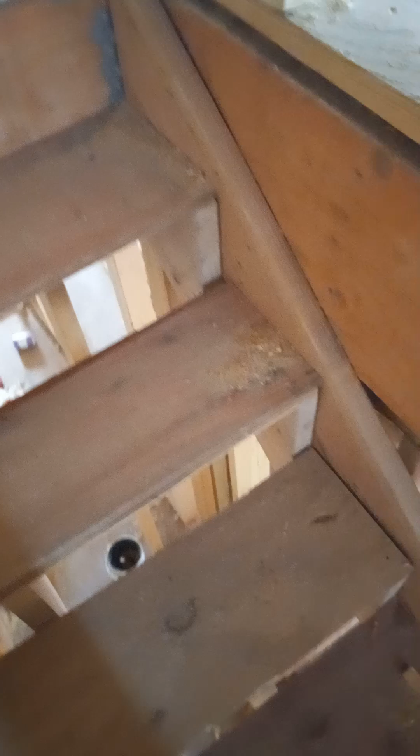Okay Eric, we're on the... hold on, get the cigar out. We're on the third floor.

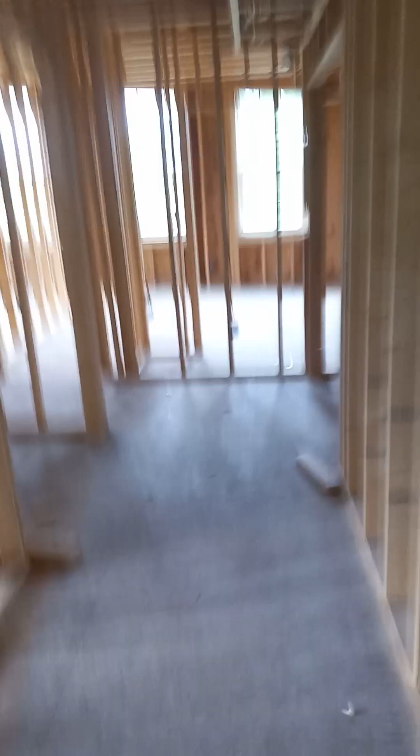Okay, let me walk in again. All right, we're on the third floor. Let me see if I can shrink this some. All right, we're on the third floor.

Okay, so here is where they have the ductwork, and here's where they have the dryer and the hot water heater. Technically, the hot water heater is supposed to be here, see the stairs there? And the washer dryer is supposed to be where they've gotten the hot water heater.

Okay, let's step into, I'm just gonna call it room one again. Okay, the closet is right. I'm gonna do it from that cavity here, is correct.

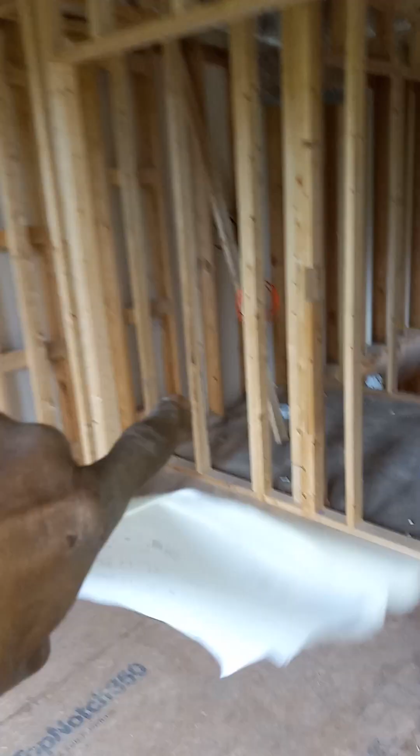Although the lights are supposed to be 4 rectangular lights going around in a square, four lights in a square, they only have 1 up here, which we can piggyback off of. All right, might have to put a junction box, but we have to piggyback off of that to make the 4 lights happen.

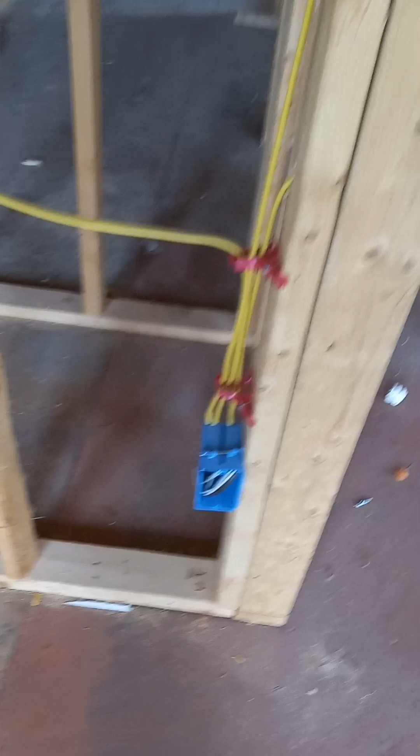There's supposed to be 1, right? Okay, I would love to take this and move it over here. So there's supposed to be 1, 2, 3, 4. Hold on one second. So I can, okay, 1, 2, 3.

I'm going to the stairway. And so, in other words, there's only supposed to be 1 outlet against this wall, but there's 2. I got to check with code and see whether an extra outlet is feasible, even though it's not on the blueprint.

No, pardon, yeah, there's supposed to be 2 here, so we might have to just put 1 centered, right, and 2 over here, and there's 2 on this wall, 1, 2. Again, it's the lighting situation in here, so we'll go to room 2.

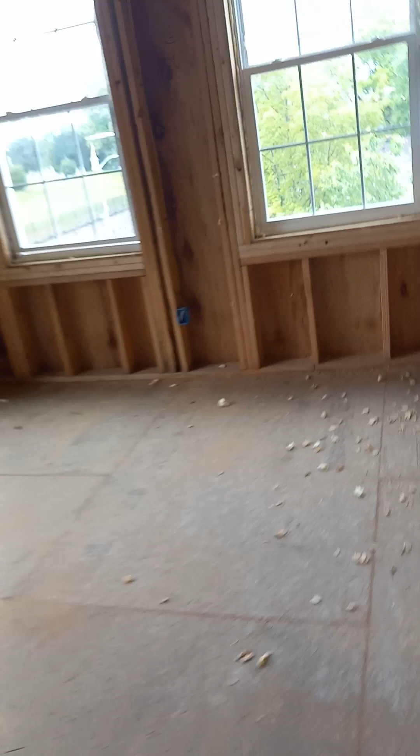All right, room 2. Again, there's only 1 light that's supposed to be 4, evenly measured and centered, you know what I'm talking about. And there's supposed to be 2, 1, 2. So it's supposed to be 2, 1, 2, 1, 1, 2. And they got a third one.

All right, so I'll have to check the code, and they got 1 here. All right, the cavity of the closet. Bear with me. The cavity of the closet is correct.

Then we get here into the bathroom, right? We're gonna have to change this lighting situation. There should be, they got the 1 light over the tub, but there should be another light somewhere along here because you got the sink, or centered, all right? We'll figure that one out.

But I don't think it definitely shouldn't be way over there, all right? Because that's the tub, and it's way over there in the corner. So that shouldn't happen. That's about maybe a foot, maybe 14 inches away from the wall, okay, and the bathroom's much bigger than that.

Everything looks to be correct here. The pipes are coming up, everything, but here they haven't installed the situation for the tub, the PVC plumbing for the tub. So that has to be done.

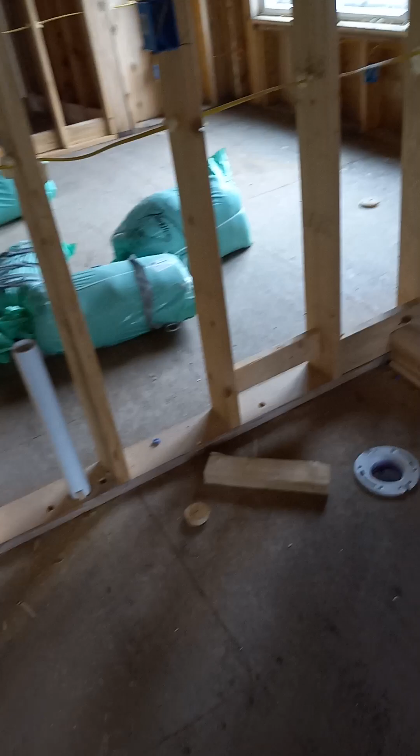Past that, it's looking like over here, 2 sinks, light. Oh, that's why they didn't do it. So we can leave that light like it is because we have 2 lights on the wall.

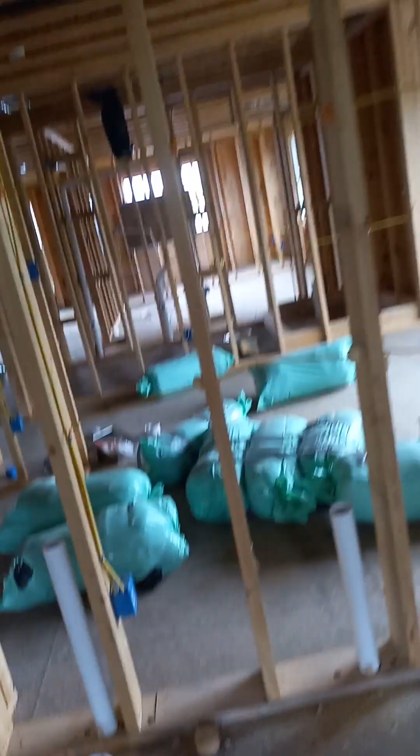I don't like these type of fixtures. I like these type of fixtures, all right, clamped on in the bathroom. These type of fixtures, those are skeletons, all right? They don't hold as well as they should. So we're looking good in the bathroom.

Now, give me a second, coming out of there. Okay, this cavity is correct.

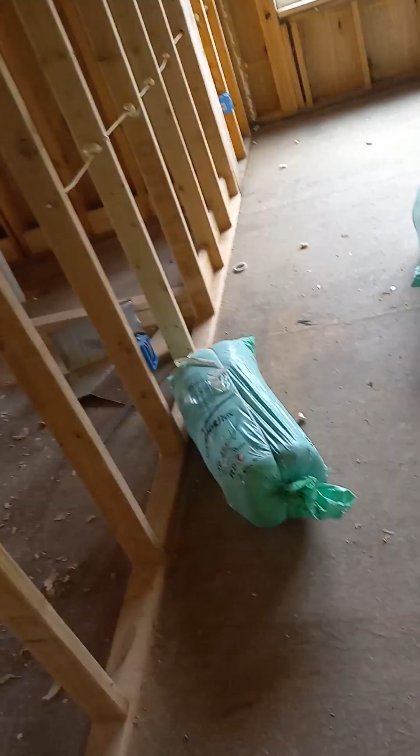Now we're going into room 3. Room 3 is the same thing, 4 lights on the ceiling, right? Measured evenly, distant evenly, and so it's all centered. All right.

Outlets are okay, 1, they got 2. There should be 1 there, there should be 1 there, there's 1 there, and there should be 2 here. So that is definitely correct. Again, it's the lighting issue.

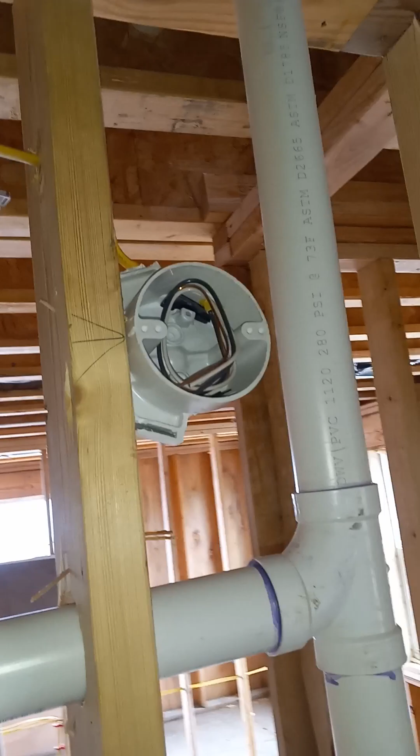Okay, so we're moving on to the next bathroom. All right, we're looking good. See over here, they put the correct boxes. All right.

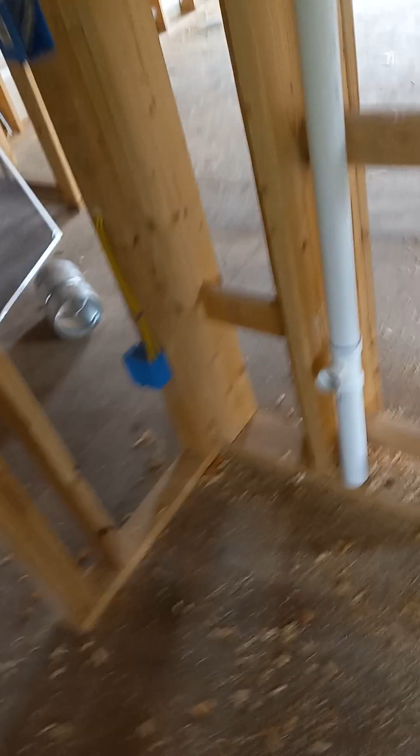I don't know why they didn't do it over there, skimming off of the money. Okay, the plumbing is looking good. GFI is looking good area, all right?

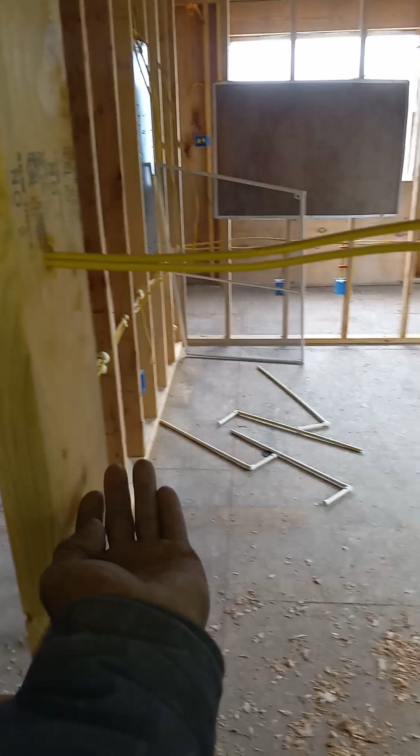Although it's a double sink, the GFI should not be over the toilet because that's the toilet and the GFI is right there in line with it. I'm trying to get back so you can see, all right? The GFI should be, let me step through this. Okay, you can see the two lights, one, two. All right, you see the plumbing, so the sink is there. GFI should be centered, even if we got to take a stud and put it across, to stud it the right way, because it's for the sink area. It shouldn't be here.

Again, this is looking good. Now, when you get here, right? This is where the kitchen is supposed to be. All right, refrigerator, stove, so forth, cabinets, so forth.

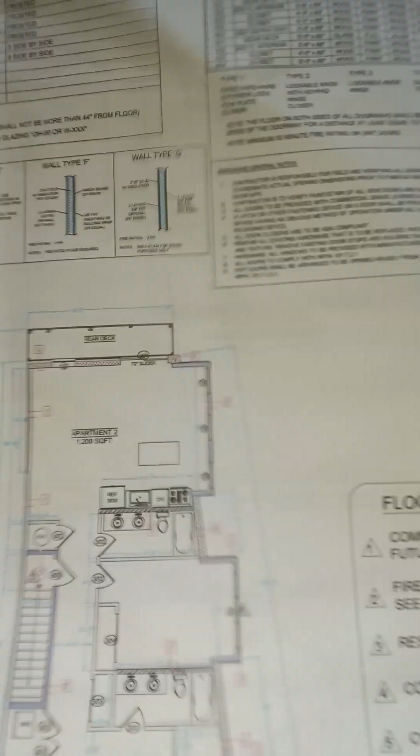This wall, and according to the blueprint, all right, let me give you what I'm talking about, right? Here's where we're at, right here. So we just left that bathroom. This is where we're at. This wall here, going all the way across, should not be there because an island is supposed to go right there as in accordance to the blueprint.

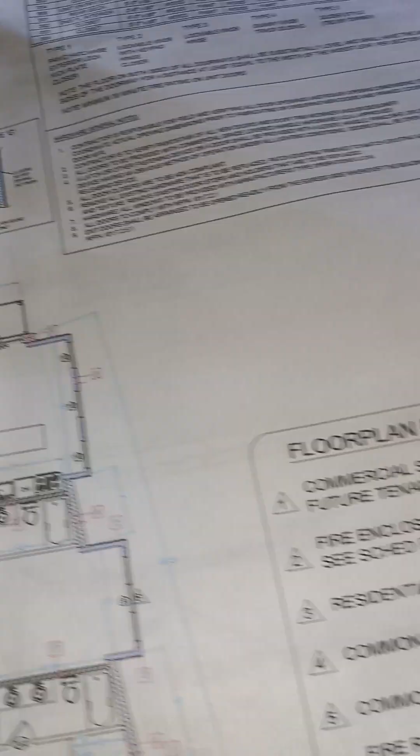And then that's what I was talking about, the rear deck. So if you're not doing the deck and they did something, maybe they changed it. But what I can't understand is why would they have an island over there with a wall around it. Okay, where the people, where's the open space for the dining room? You follow me?

So that's an issue. Okay, again, even the lights going this way, you see how they got one light, two lights, three lights, that's too many lights. They're supposed to be spaced out, and it goes on, all right? You know, you got one, two lights right together. It's not supposed to be that way, according to the blueprints.

You know about the washer dryer versus the hot water heater. So I can look at it and say, now it looks like.

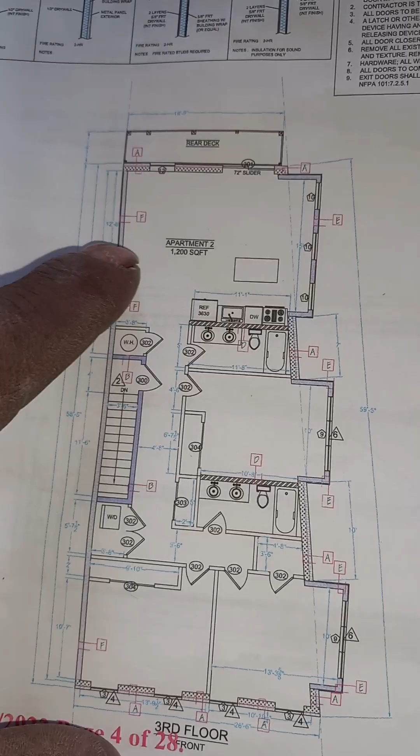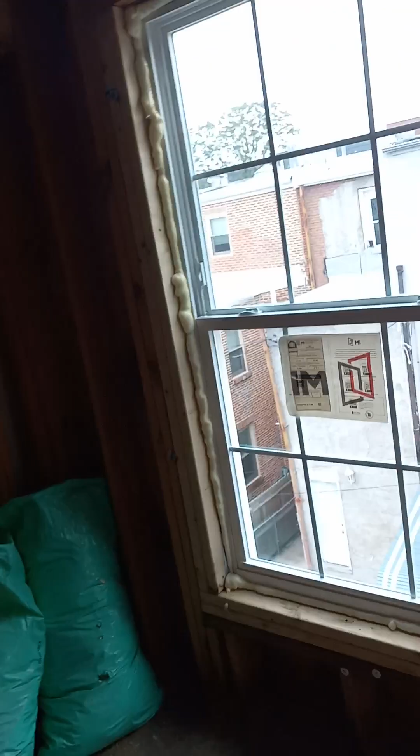So here's the blueprint, right? Now I'm going to face this wall here. That's the wall I'm going to face to right now, because this is the front. So I'm going to face this wall right here. So it seems like they put everything for the kitchen on this side of the wall, which is not supposed to be, in accordance to the blueprint. It's supposed to be over here, the kitchen. So that's what we're dealing with.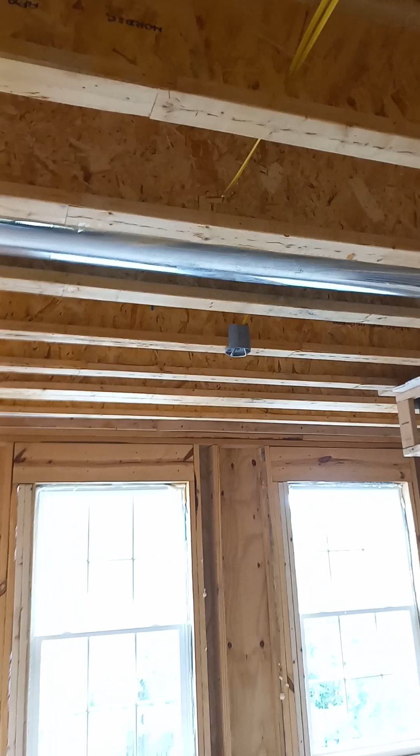They got one light there, one light there. According to the blueprint, there are to be, it's just to be, well, it is to be two lights, one light, but I think they got the symbol wrong on what this is supposed to be. But I'll have to look at the blueprints in detail to ensure that. So in this bedroom, there is one light. And there's supposed to be

One, two, three, four, five, six. So we got the closet cavity and, okay, the closet cavity. Bear with me. The closet cavity in this bedroom is correct. So we got one, two, three, four, five. All right, so what we're missing here is, bear with me.

On this wall, there should be 2 outlets on the front wall. That's what we're missing. Okay, I'm stepping into room number 2 on the second floor.

And that's looking good, the plumbing is looking good. They got the plumbing in on this one with the membrane. And we're looking good here. So that's bathroom 1. Okay, this cavity is correct on the blueprint.

Now we're going into bedroom number 3. So bedroom number 3 calls for 4 lights, which they don't have. The cavity, bear with me, I know it's pointed to the floor but I need to check the cavities. The cavity now.

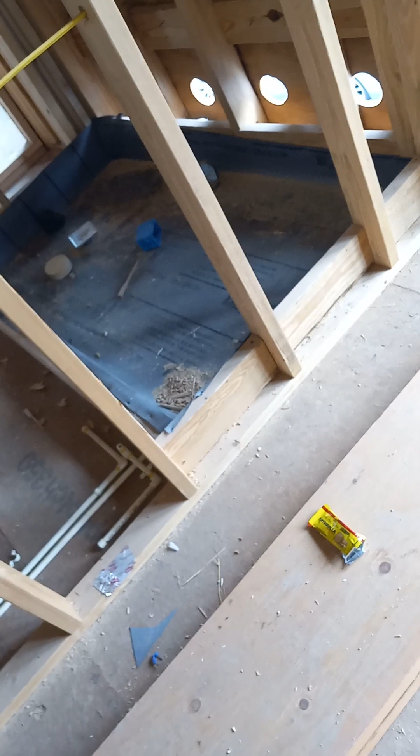Okay, the closet cavity is correct. We should have a number of 1, 2, 1, 1, 2, so we should have 3. We have 1, 2, 3, 4, 5. Okay, and if they had centered over here, but this is a rearrangement.

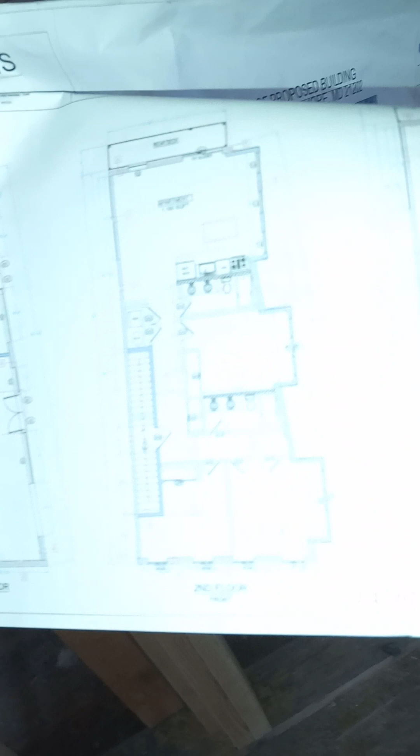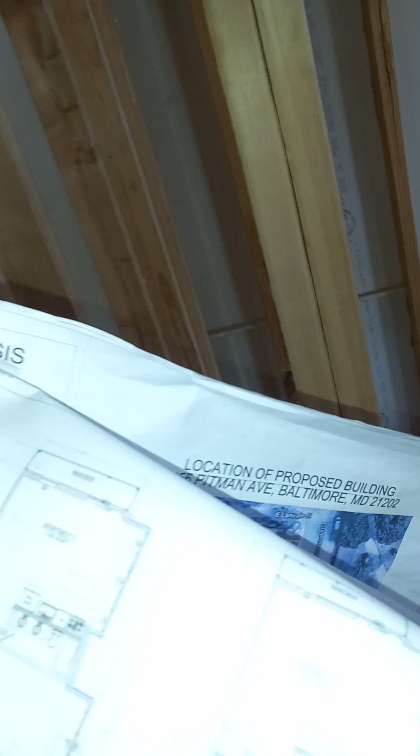Again here, they have, where's it at? Bear with me. Okay, so here we're good. Over in this cavity, I might have misspoke. Over in this cavity, it's hot water heater and hot water heater here, and

Wow, Nate, you're losing it. And hot water heater is supposed to be here, and washer and dryer is supposed to be here. All right, okay, again we're back to. You can see. Why am I not getting that? Hold up.

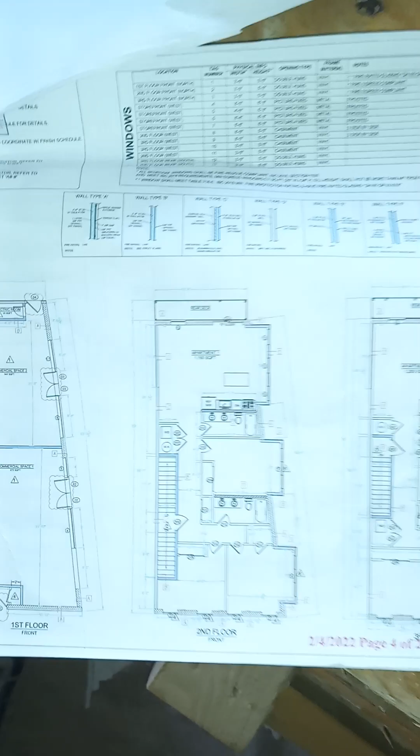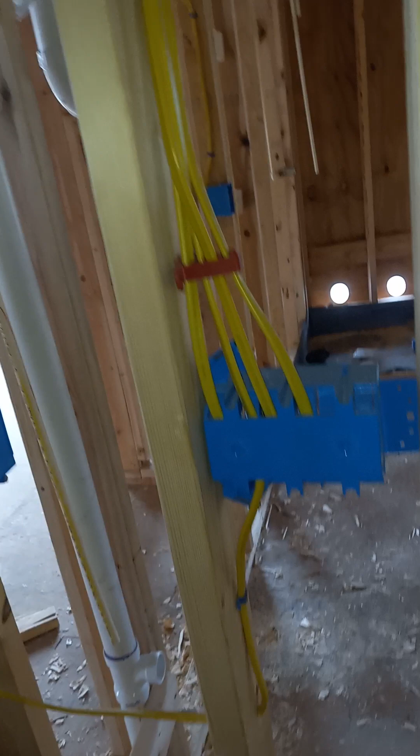Okay, so you can see over here, right? It's open. You come into here, and this is where we're at. And this is where the kitchen goes behind the bathroom. You see? And the kitchen's supposed to be over here. So let me just curve this so you can. Okay, so the kitchen is supposed to be right behind the bathroom, and the island is over there, but they got the same thing going on.

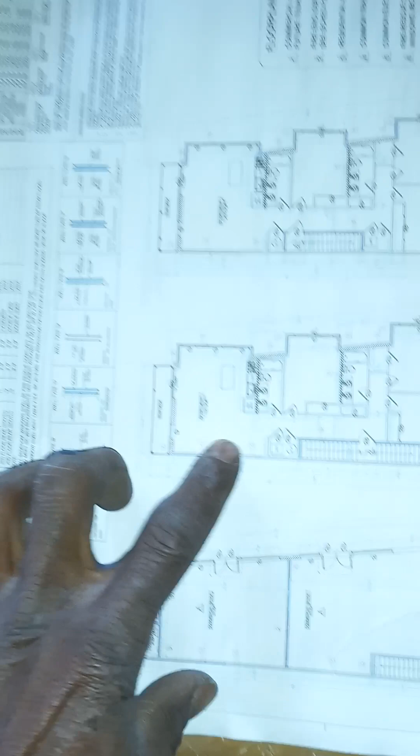All right, they have the same thing, and they put everything for the kitchen over here on this wall, and the kitchen clearly is supposed to be over here with the island. They put everything here, all right? And that's the back deck that was supposed to be. Apparently they started building it. You can see the ledge or whatever. I don't know, but you're not doing that.

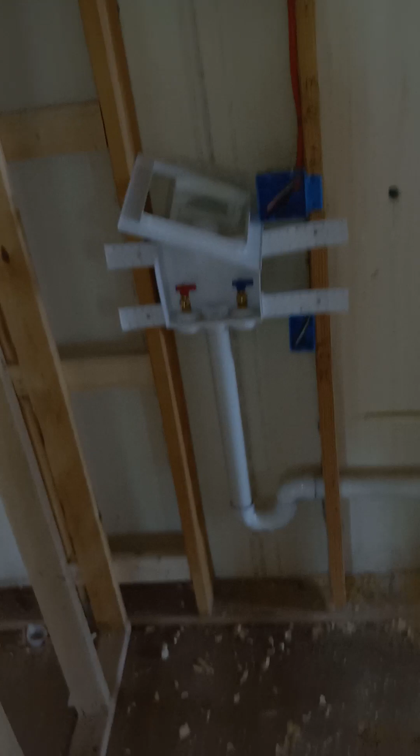Okay, well they do have the washer and dryer. Okay, so this is supposed to be, hold on one second here. Okay, so the hot water heater is supposed to be here in the cavity coming from the steps. Let me just check something here. And the washer and dryer is supposed to be over here. So it's just a swap out. You follow me? It's just a swap over.